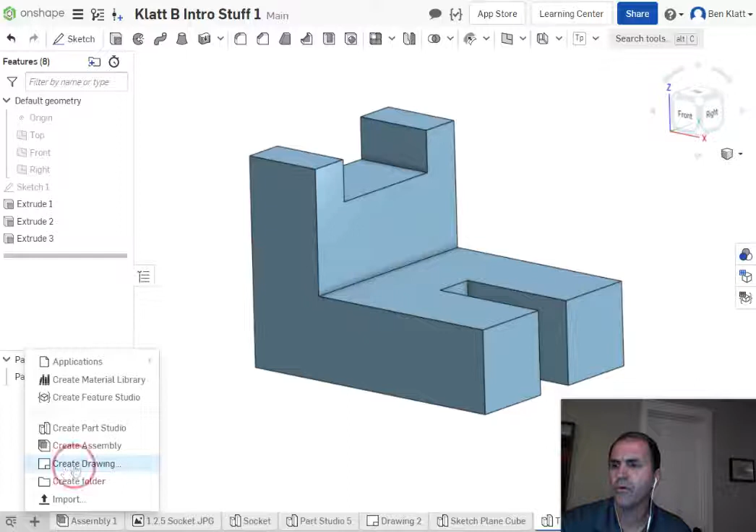And then we are going to create a new drawing by going to this little plus symbol down here, bottom left, and we are going to create a drawing. Okay, now a bunch of different templates will show up. The first one on the list should be, and if it doesn't have anything, you can say show the drawing templates. The first one should say ANSI A-inch. That's the one that we are going to use most of the time. And we do want no views.

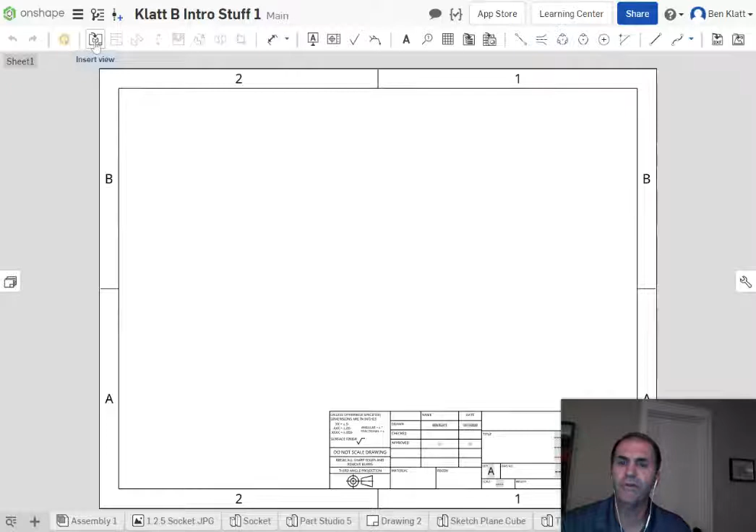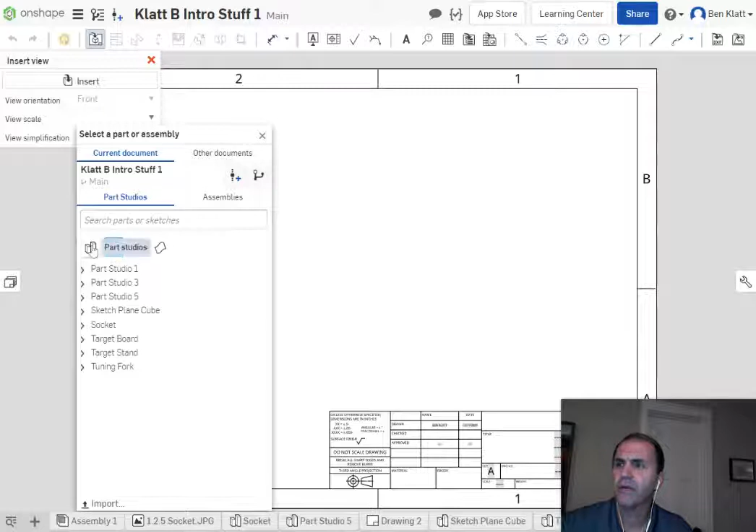Click OK, and it will open up this drawing file that now has a piece of paper. Now, for some of you, this will open up like this. For others, it won't. If it doesn't, up here in the top, it says Insert View. Click on that. Then click on Insert. Now we're kind of back to that spot. Now, I want not this Parts, but I want my Part Studio, because if you click on Parts, it's just going to show you a list. Part Studio will show you actual pictures.

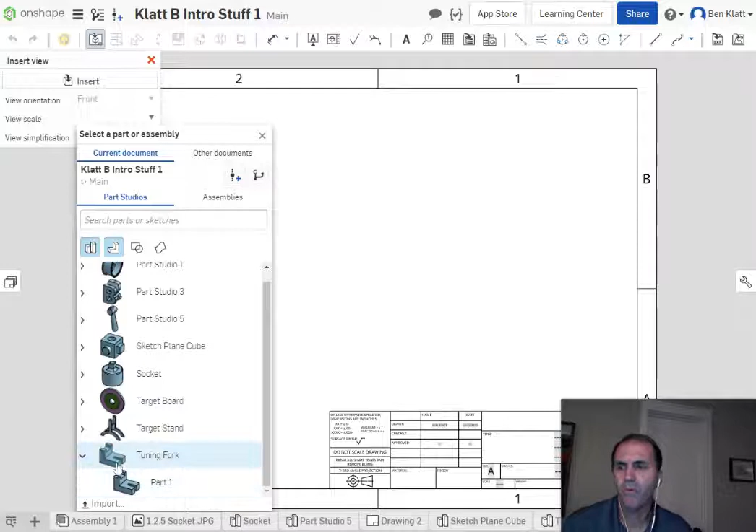Now you do want to go in here and get a part. So here's part 1. However, for the purpose of this, I'd like it to say tuning fork because I never named part 1, and it's all part of the same part anyway, or should be. So we'll click on that. Now this brings up an automatic preview of what we're going to see in the front view. Now you should see this if you built it the way we talked about. And right now it's 1 to 6. I think that we'll go ahead and stick with that scale. Will look fine.

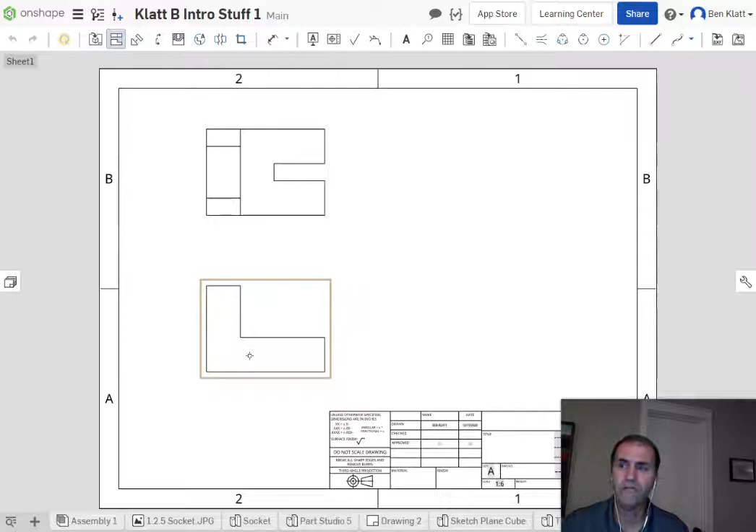Now, as soon as I left click, normal mouse clicking, it's going to place that view, and it's going to give me a little preview of it. And if I drag my mouse again, whatever's gold, orange, whatever that color is, it's projecting that view. So I'm going to come up here straight up, not over to the side any weird way, but straight up, and click to create the top view. Now, that's gold now. I don't want to project that view. I want to go back to the front, click the front, and we're going to now project the right side view of that. Click to place it.

Again, I don't want to project this. I will always want to project the front view. Click. Okay. And then we're going to drag our mouse. I'm not holding the mouse button down. I just clicked once. Coming up here to set the isometric. Click. Okay, and I've placed my views and can hit escape. If you need to, you can watch that again.

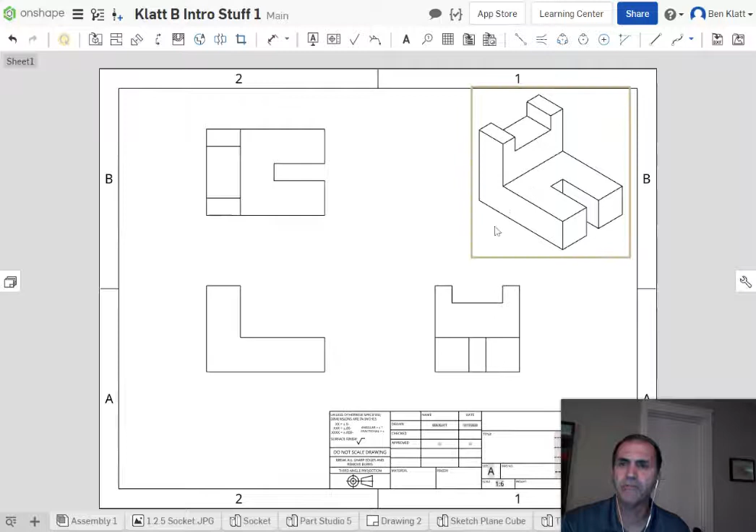Now, I always make a habit of making my isometric shaded. So you can come up here to the isometric, and while it's highlighted, click it, double click it, sorry, never mind. We're going to right mouse click, and somewhere in here, it will say show shaded view. And that will make it pretty. We don't shade these views. We shade only the isometric.

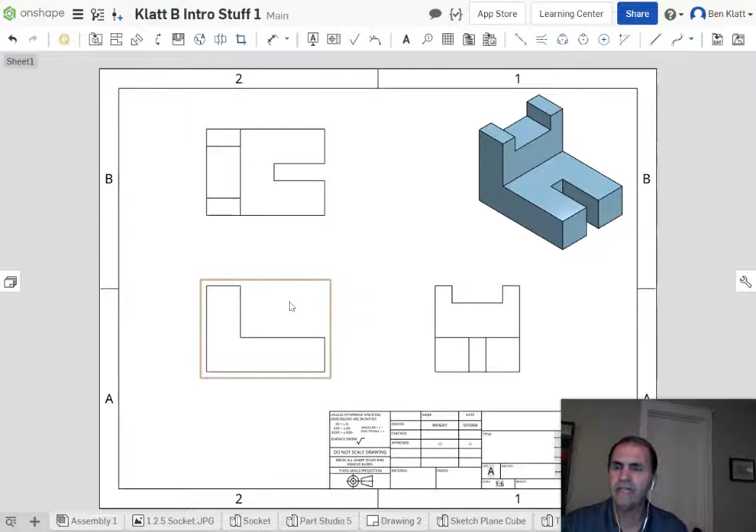Now, later in the dimensioning video, we're going to talk about turning on hidden lines, but we should always look for that. So I'm going to do that now. And we're going to right click over here. This is the only view that will have hidden lines in it. So we will right click, and this happened to me last time where it's hiding up here. So I'm going to drag that down. So yeah, it's weird. This little window wants to hide under the toolbar. So I had to drag that down because I knew that was there. Show hidden lines. And it's going to show those guys.

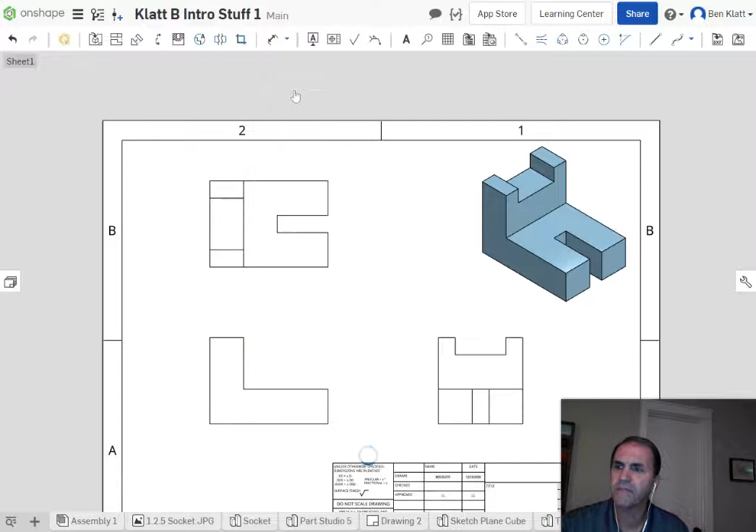So in your next video, we will talk about how to dimension that thing.